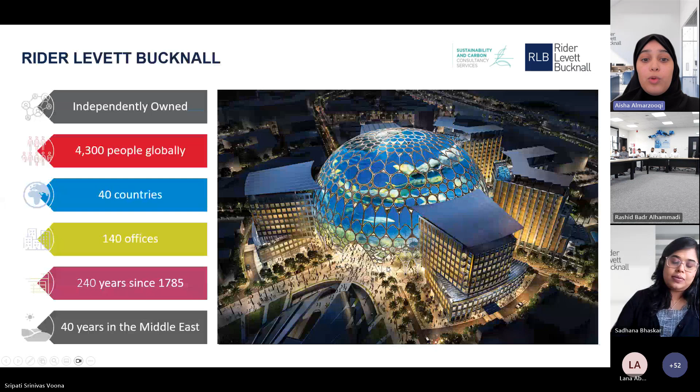So first, to begin with, Rider Levett Bucknall is an independently owned company. We are more than 4,300 globally, spread across 40 countries, operating from around 140 offices, and we have been in the Middle East for more than 40 years.

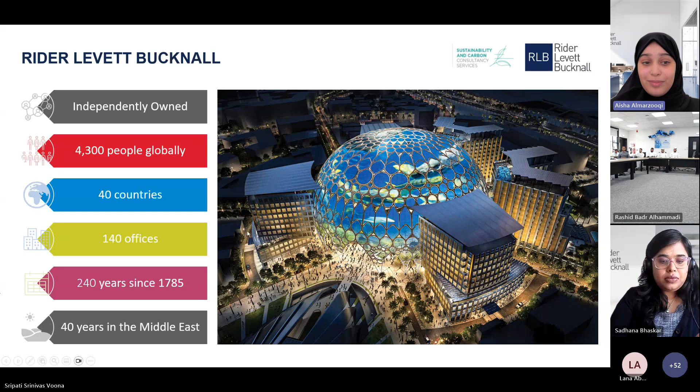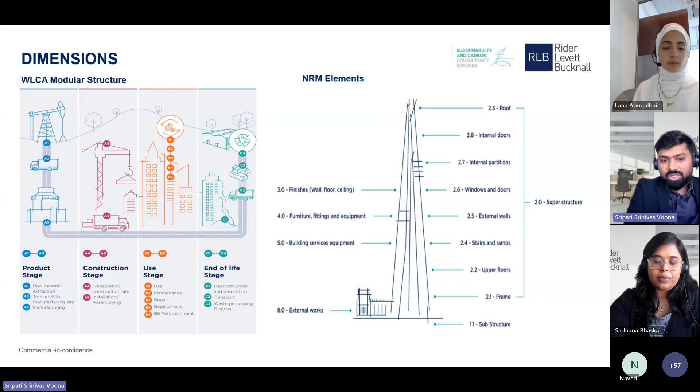On the left side, you can see the WLCA modular structure. This tells the life cycle of one single project from the initial product stage to the end of life cycle stage. We are emphasizing mostly on product stage and construction stage, which is module A.

As UAE is now mostly concentrated and emphasizing on this stage, because when we compare the studies, the whole carbon emissions from the construction industry, let's say, is 100%. Then 30% of the emissions come from the initial stage, which is product stage and construction stage.

So when the life cycle of a building is 100 years, the initial construction stage would be only 2 to 3 years. In this short amount of time, we have a significant chunk of carbon emission to reduce, which is 30%. So we are mostly concentrating on product stage and construction stage during this time.

So holistically, this is the WLCA modular structure, and in our sample projects we will be identifying more on the initial stage.

Coming to the NRM elements, this is the common scope where carbon and cost are brought together based on these categorizations. Here you can see superstructure, substructure, finishes, furniture, building services - these are the group elements. To make our data more interpreted, we have broken it down further into elements.

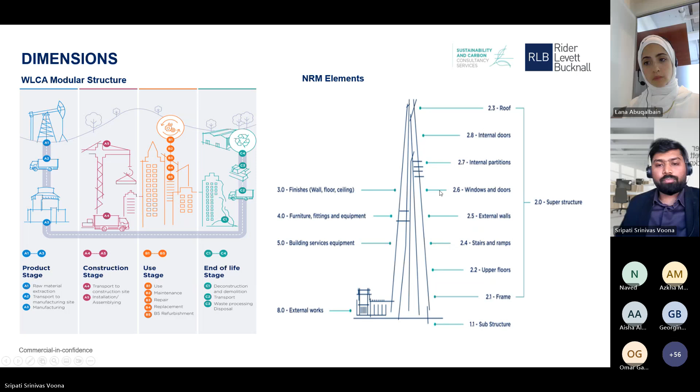Yeah, Salah, you have some question? I noticed that you are including the building service equipment as part of the whole life carbon assessment. Can you please elaborate more on that point?

Building service equipment, as we are talking about the product stage and construction stage, we'll be talking about the embodied carbon related to this building service equipment, where let's consider an EPD taken for an equipment done by the manufacturer. Is Lutz back or still not? Sorry, hello, I think someone's listening.

Coming to the building service equipment, let's consider an equipment, HVAC equipment, generator, whatever it is. It will be brought by the manufacturer, so when it comes into the market, it will come with a price and an EPD. Using this carbon factor from the EPD, we'll be generating these reports.

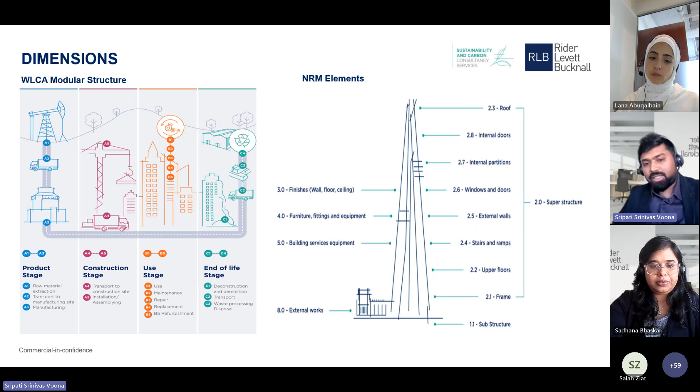In the later stages, during the result time, we can really discuss this in more detail.

Over here, we are demonstrating how we do carbon assessment using our RLB software called ROS 5D. I'm playing the video. We have highlighted the major elements, which is column and beams, as sample products to identify how we do the assessment using the software in one click.

These are the elements and categories. The items added into the software are the categories and the dimensions which we are going to measure. The first line item is estimated cost, which is in AED or whatever currency we want to find out. Below that are the carbon factors.

The first one is the product stage, the second one is transportation to site, and others. As I highlighted, we were working on the initial stage, which is the A module. We have highlighted that in our ROS 5D.

Now what you're seeing on the screen is the one-click interface, where we identify the elements required for the items listed in the BOQ, which is column and beams. For the columns, we require three major elements: concrete, reinforcement, and shuttering. We are identifying the items required for those elements.

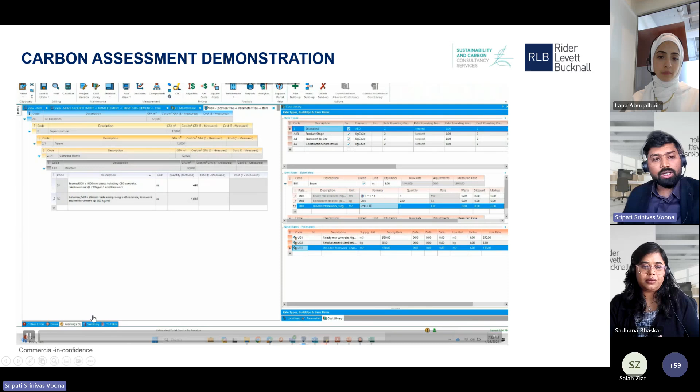Based on that, for beams and columns, we are preparing a rate analysis which includes all these items, giving the comprehensive price for each item. This rate type will be linked to the items which are listed here.

So at the end, we'll be in a position to identify cost, which is here, and carbon, which is here. Consolidated, we are able to identify the comprehensive report which contains the cost of this element and the carbon factor of this element. To make this easy to see on screen, we have highlighted only the product stage factor, which is A1 to A3. In a similar way, we can add additional columns and identify the total carbon factor here.

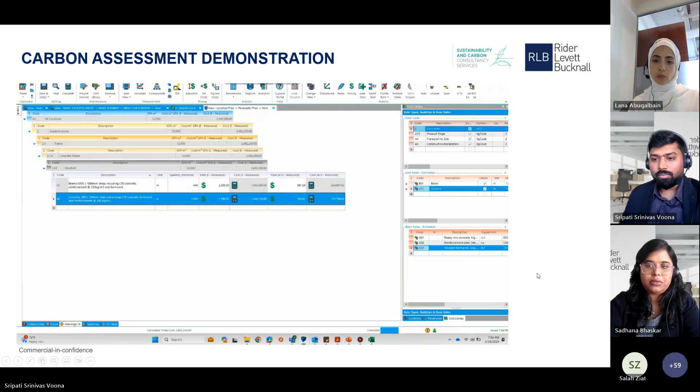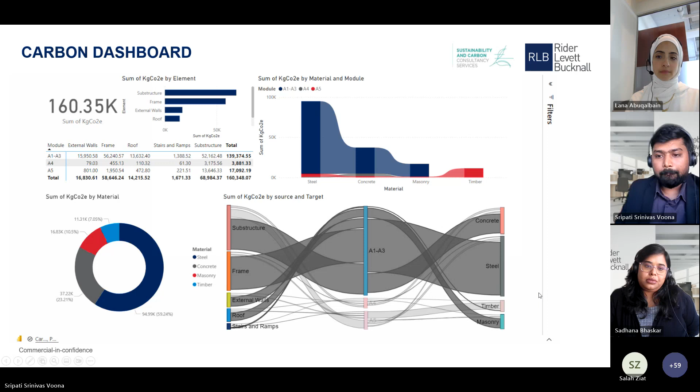And in the next slide, we are highlighting the integrated reporting, where we talk about both cost and carbon.

This helps us identify which is the best element to target to reduce the carbon and also the cost.

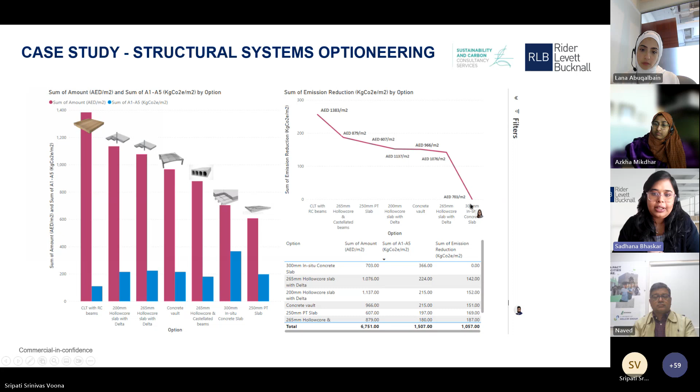Now, the next one is here, the 265 hollow core slab with delta. You're able to achieve a good reduction, which is between 100 to 200 kg CO2 per meter square. But what is the price you're paying? You're paying around 1076 per meter square. Now, let's say your client says, you know what, guys, tell me an option that satisfies both. I'm okay to pay a little premium, but I want to achieve good carbon emissions, but don't make me pay so much that it's going to absorb all my contingency.

Then in that case, you can analyze using this curve and identify that this particular option over here, the 250 PT slab, gives you a good carbon emission reduction, which is between 100 to 200 kg CO2, but it comes at a cost of 607 per meter square. Now, this is obviously the best case scenario because the cost is low, you're achieving carbon emissions, and it works in all cases. It checks all boxes. So that's the option that we would propose to the client. This was one example of the structural systems optioneering.

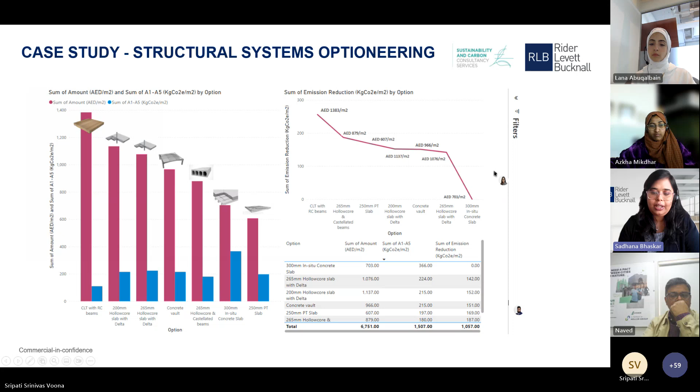Again, all of this varies. Even the cost of the structural systems varies vastly. Now, the whole concept of saying PT slab is less expensive than the conventional RC slab also comes with a caveat. It depends on what is the quantity of PT slab we are looking at, how the design is made, because this is a particular case study for a project. In this project, the amount of PT slab was extensive, which would help us achieve that cost savings when compared to conventional slab. This obviously will vary from case to case, and it has to be analyzed on that particular case, and then an informed decision has to be made. Moving forward, this particular case study is on a facade system.

Lana, I have taken control, so no problem. I'll handle the controls. Thanks.

Okay. The facade system optioneering. Facade is also a key cost driver. Often when we look at value engineering options, we always target the facade because it's more often than not a key cost driver. Here we've tried to do an optioneering exercise and compare two different options. One is your BIPV panel facade, that is your solar panels on the facade itself, which will generate your power. And the other option is going for a terracotta cladding on the envelope, which obviously will not generate power, so you'll have to go for local power grid support.

Now, we've tried to analyze the cost in two aspects: the upfront capex cost that we'll have to put in and the upfront embodied carbon associated with it, and the long-term perspective, which is your life cycle cost and your life cycle assessment. Now, let's look at the first graph, the capex versus embodied carbon. When you look at the upfront cost that you'll have to incur to install both of these, your gray, which is represented by your BIPV panels, is around 558.

In terms of cost, let's say 4,200 per meter square, and terracotta cladding comes at 1,800. Even on the carbon, upfront carbon, 558 is higher than 49.8, which is for your terracotta cladding. Again, let's look at just this perspective, the capex perspective. When your project is tight on budget and your client is advising you, guys, I don't have an appetite to go for a cost premium, then obviously BIPV panels prima facie might look like it's not ideal.

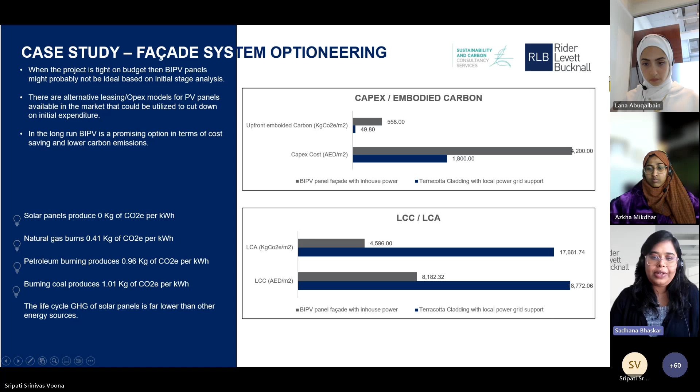Moving on, I think there was a question. Just a minute. Keen to see the case study for flooring system. Okay, I will take you to the case study for flooring system. No problem. But then I've skipped to the end of the presentation by mistake. Let me go back again.

Okay, flooring system. Flooring system is often a tough nut to crack, in the sense, see, designers often come up with certain innovative material palettes for floorings and wall finishes and all the finishes basically, because that's how they give their signature on the project, right? So it's often hard to provide a completely different alternative which is outside their material palette.

Let's say they're coming up with a granite or stone related material palette, and then we go in there and we're like, you know what, guys, why don't you try this palette, which is completely out of what they have envisioned for the project. Then obviously as designers it would be tough for them to accommodate a completely alien material, in terms of comparison with their existing palette. So yes, this particular flooring system optioneering is more of a research based case study.

I would like to clarify that here. It's not been implemented, it was not based on actual project data, but it's more like a research from our end to evaluate what would be the low carbon alternative. And I think we have a question here. Let me just stop right here and see what the question is.

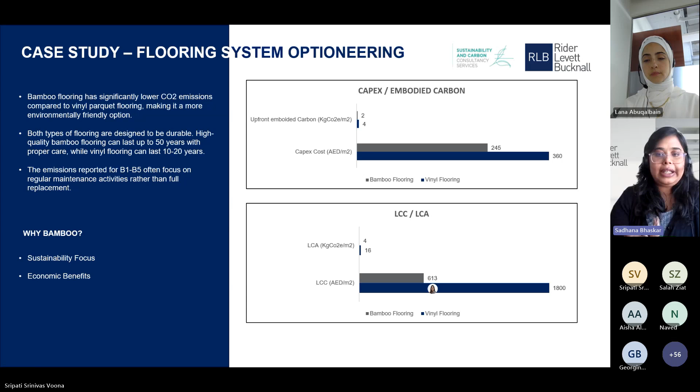So considering the replacement cycles, the LCC of the bamboo also presents a good alternative. It's around 613, whereas your vinyl flooring is 1,800 per meter square. So why bamboo? Bamboo gives you that sustainability focus and it gives you economic benefits. And we are seeing a growth of good quality bamboo vendors. Recently, we even interacted with Ecomat Pro, who are producing good quality bamboo decking and other bamboo solutions. So yes, it's time to consider bamboo as an alternative to your traditional materials.

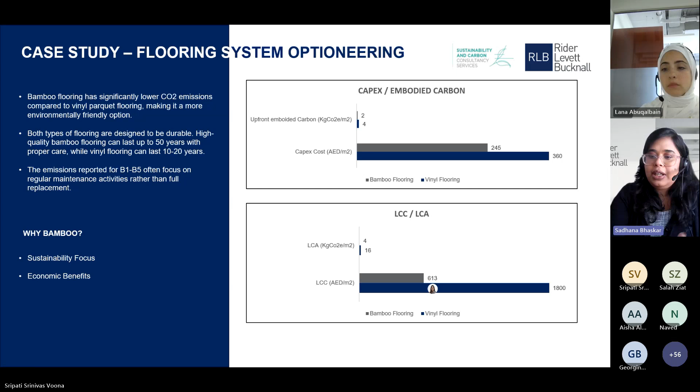Now I'll go back to the questions that were asked when I was presenting this slide. Naveed has asked, typically concrete screeds are placed below the topping products, vinyl carpets. Can you please include them in your carbon and cost calculation? Sure, we can include that, although in terms of decision making, the concrete screed additions might probably not affect the choice, because we have to go for them in both the cases that we consider. But yes, we can take that into account and update that. But in terms of decision making, I don't think this will change what we propose as an alternative.

Which database is integrated with the tool for CAPEX and LCC? How often is this updated? That's from Ishan. If I understand your question correctly, you're asking which database is integrated with the tool for CAPEX and LCC. So we have our in-house tool, like Lana previously mentioned, and Aisha also touched upon it. We have our tool called ROS5D. It's an in-house estimation software. We generally tend to do our CAPEX estimates on that software. And currently, we're also in the process of integrating ROS5D with our Excel model for LCC. So that's also underway. Soon we'll be able to generate LCC models directly from ROS5D as well. I hope I've answered your question.

From Salah, we have another question. Could you please share with us other facade case studies where you compare the cost and embodied carbon for different types of glazing, insulations, and block works? Yes, we could do that. For the sake of this workshop, we've conducted these case studies because we did not want to do too many facade case studies. We wanted to touch upon different elements of the projects. But sure, maybe for another session, we could take up these case studies that you mentioned.

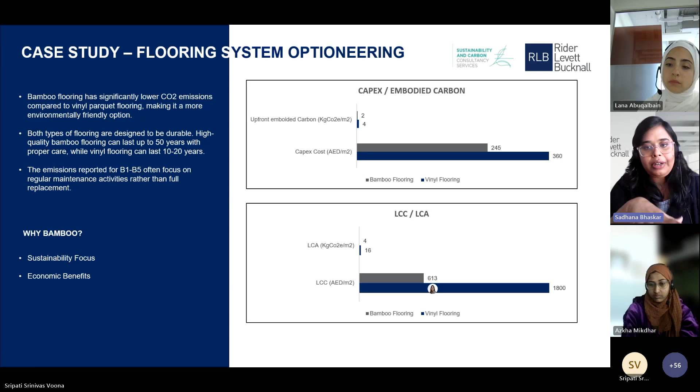There are different types of EPDs. There is third-party verified EPDs, which is the highest level of validation you can get, because an EPD is something released by the manufacturer, but when it is validated by a third party, you can rely on those values. We often look for third party EPDs as a priority when we do our carbon assessment. So yes, it is validated and it is from an external software.

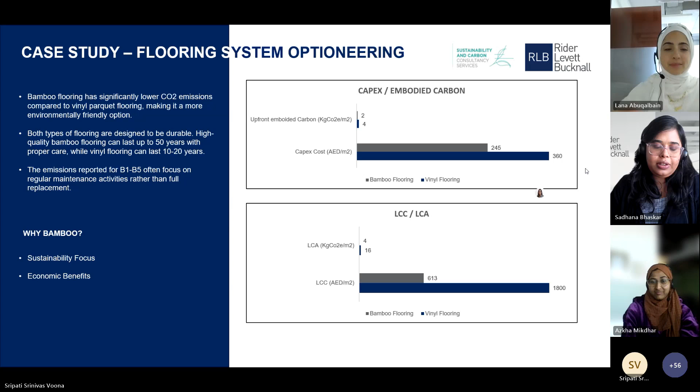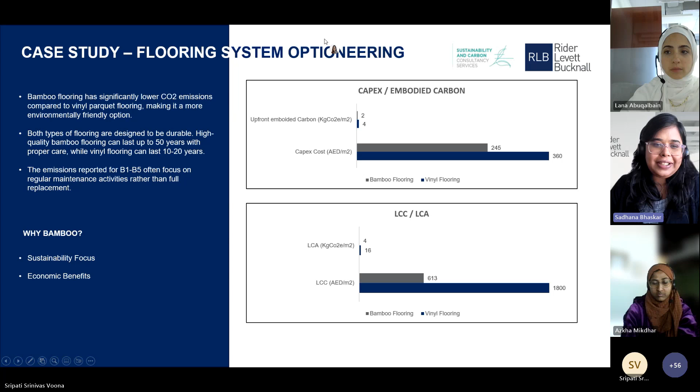I don't know why this is not moving on. Lana, can you help me move to the next case study, please? Okay, thank you, I've taken control now. I don't want to take control. I think it's better you move the slides.

So the last case study we are going to look at is on sustainability rating uplifts. This is a very interesting question we are always asked as cost consultants. Let's say we are talking to a client and the client says, yes, I want to go for LEED Silver or LEED Gold or WELL or Estidama, whatever it is, and they want to know what's the premium they're going to pay.

Like we discussed on the particular slab systems, obviously when you look at a project level, you will have to pay a certain premium to go for a better quality in terms of sustainability. So what's the premium we are looking at is a question that's often asked of us as cost consultants. So we've tried to address that question using a case study.

It's a project we worked on in Abu Dhabi, a headquarters. The GFA is around 32,000 square meters. It's a commercial project, basically an office for an environmental agency. They were very sensitive to the sustainability targets they had. As you can see, it is a one-of-a-kind landmark project in the field of sustainability.

The targets were all high: LEED Platinum, Estidama Pearl 5, WELL Platinum, and Net Zero. All of these targets were part of the project brief. So when you have such tall targets, obviously you will have to do a good level of analysis on the different rating systems and how best you can leverage and identify synergy between these systems.

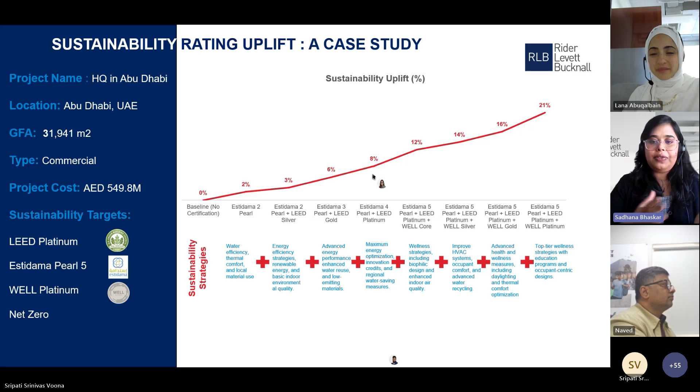Okay, I think conscious of time, I've come to the end of my section. So far, I've tried to give a micro level analysis of the different systems, which are mostly key cost drivers and important when it comes to carbon emissions. My colleague Omar will now give you a macro level perspective and take you through the market trends and future prospects. Over to you, Omar.

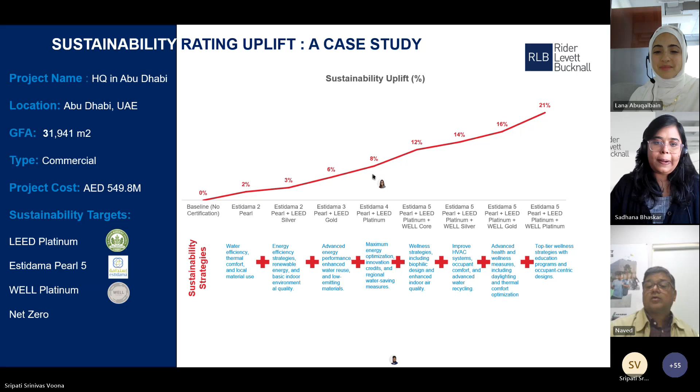Thanks, Sadhana. Okay, so thanks for walking through these case studies. They were interesting, and as I can see from the chat, looks like more than one is interested with this slide. So what you have shown gave us some sort of a detailed micro-level perspective on how sustainability can be implemented. Now I'll be covering the macro-level trends and the certifications that are shaping how sustainability is being used globally and how the frameworks would be adopted.

So let's start with some numbers, because nothing says what we're talking about quite like throwing in some stats. There are currently around 195,000 LEED certified projects worldwide, covering around 29 billion square feet. To give you a sense of scale, it's roughly the size of 290,000 football fields. Just imagine these football fields turned into a green sustainable building - that's the kind of impact we're talking about. So LEED remains one of the most widely recognized certifications globally, addressing aspects like energy efficiency, water usage, and even the materials used in construction. It's like the gold standard for green buildings.

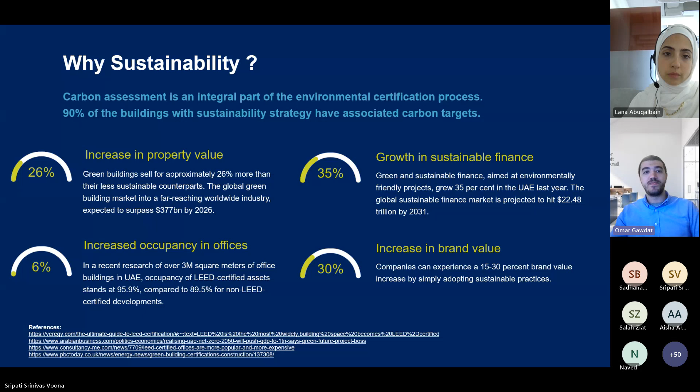The first challenge is the information on material specs. It's one of the biggest issues we face: the lack of early stage data on sustainable materials. Specifications of green materials often come in very late during the project life cycle. It's like trying to add a sunroof to your car after it's already been built. If we can start incorporating discussions around sustainable alternatives right from the project inception, we can achieve better outcomes.

Next, we have regional benchmarking. For carbon emissions, currently there is a lack of local data, but this is gradually improving. For example, there is Kandil, a well-known designer you might be aware of. Kandil is collaborating with some government entities to create a database for carbon benchmarks for structural elements. This is a great initiative, and if more designers and stakeholders collaborate on similar projects, it will for sure help create accurate benchmarks that everyone can use.